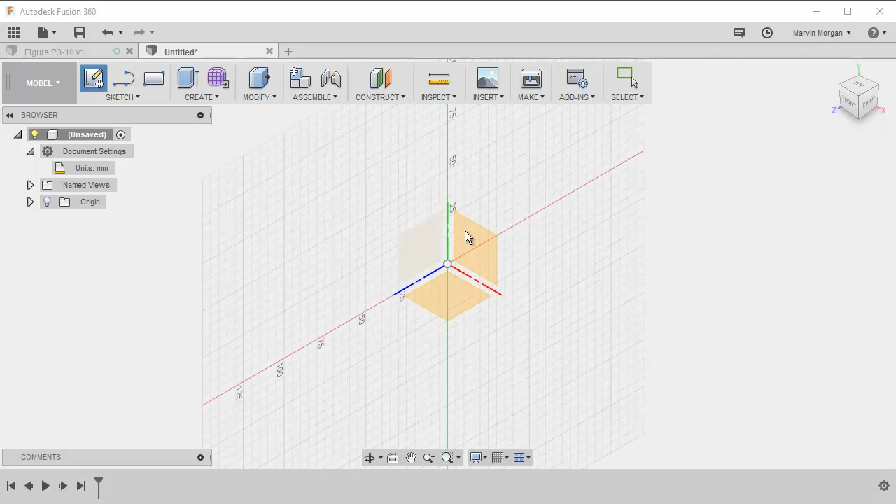From here we're going to begin a new sketch. I'm going to choose the front face of this object, using the front option of the cube, and click on that surface. For this drawing, I'm going to use a rectangle with the center point. My center will be the origin, and I'm going to stretch it out.

I'm going to type in the overall lengths. For the bottom, it should be 100 millimeters, and the overall height is 50. Once both measurements are locked in, you can take your mouse and click.

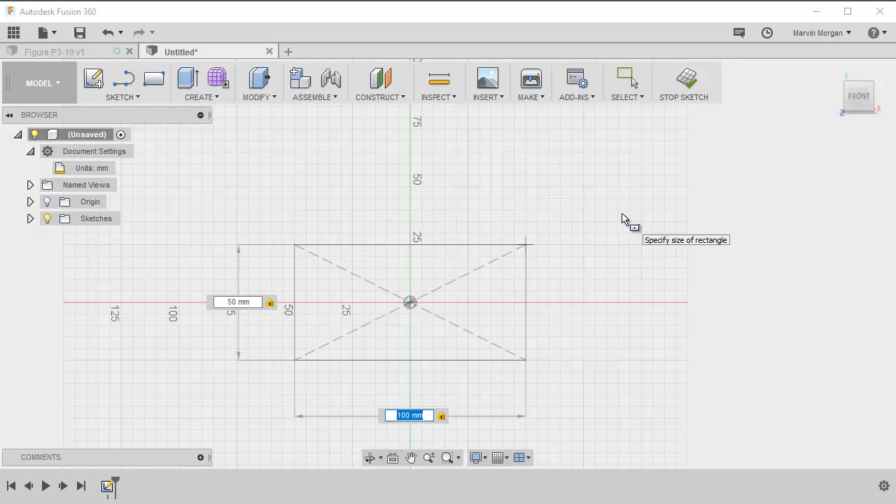Next, we will draw pretty much the profile of the front face. I want to begin with drawing a line from here over. Again, I'm not seeking accuracy at this point, I'm just drawing exactly what I see. There is a line that comes down a little lower and then over, and we have a rectangle that's about here in this spot.

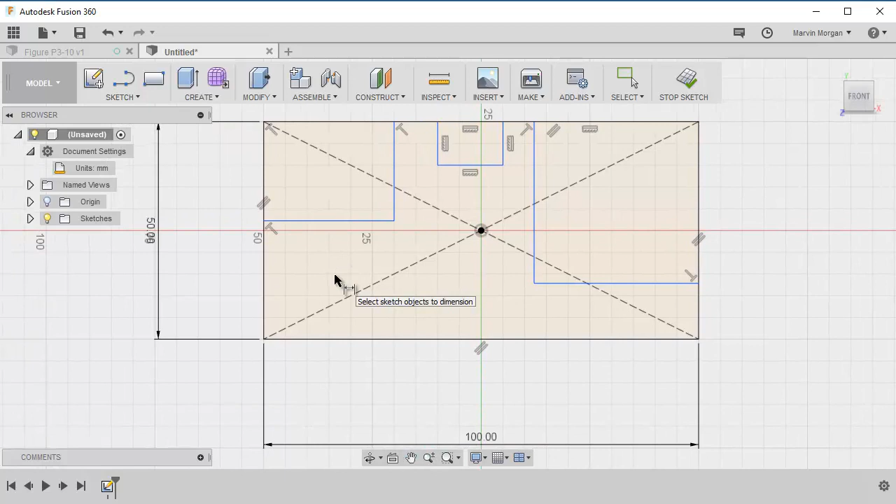Now I'm going to use my dimension command and dimension my lines for accuracy. So from this line to the bottom should be 30 millimeters. Over here, from this line to the bottom, we're looking at 15. This line here, total distance, is at 30. In between here and here should be 40.

The box is centered in the 40, which from this line to this line we're looking at 10, and over here we're looking at 10. Our box height from here to here should be 15.

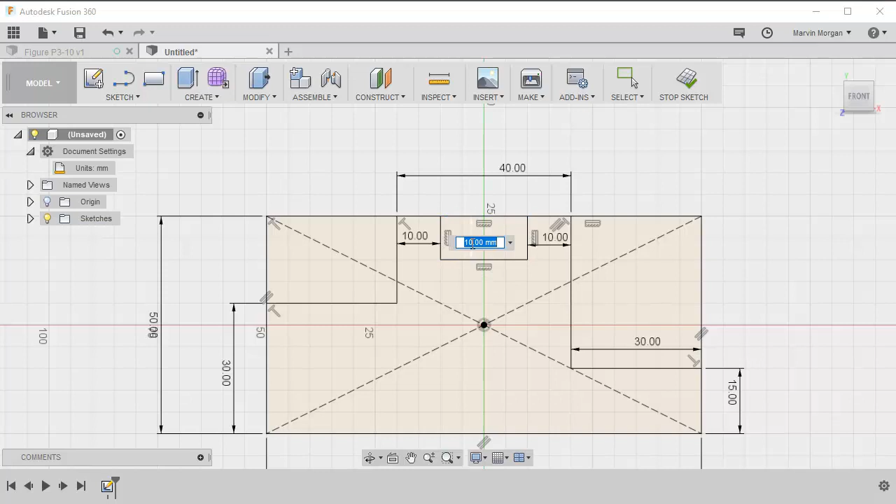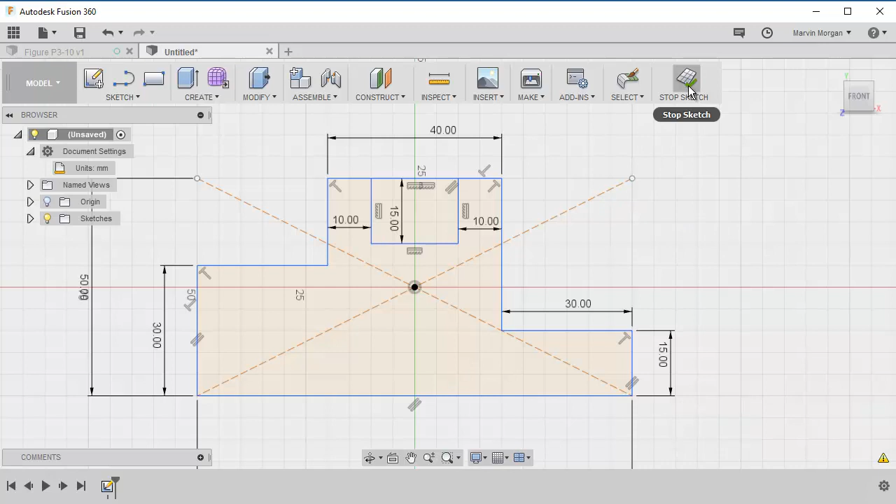That completes the profile. Now I want to use my trim command and trim the unwanted lines that we do not need. At this time, I'm going to hit the stop sketch button, look at it from a perspective view, and extrude. For the extrude, I'm going to include both profiles, and I want to go the opposite direction, so I'll do a negative 50 and hit OK.

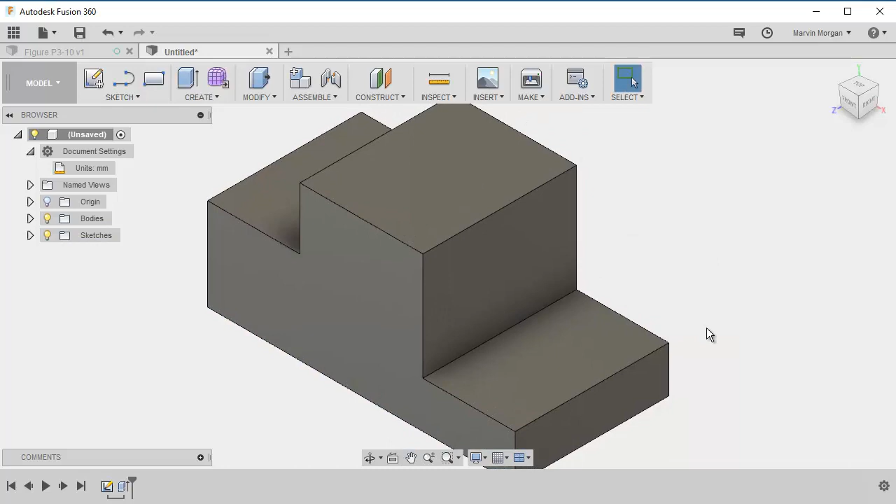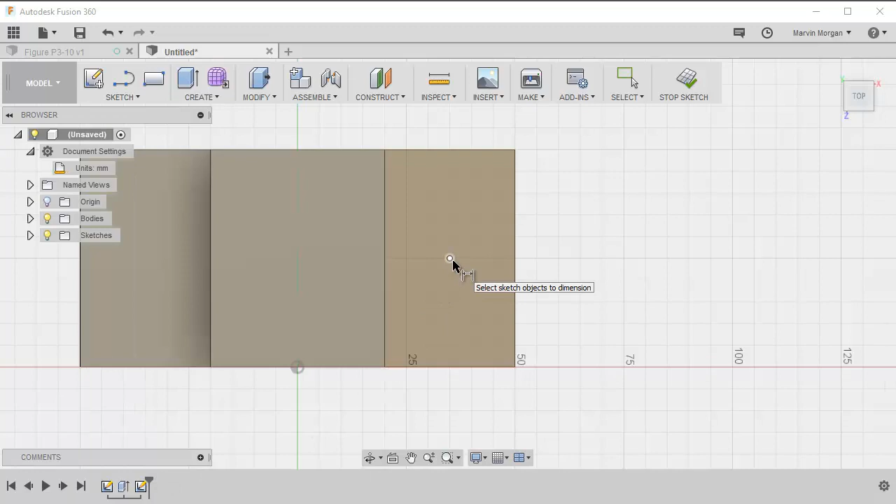Now I'm going to produce a new sketch on this top surface, and I'm going to provide a point for that surface. I'll use my dimension command and organize my point. My point should be from the point itself to this back line 25 units, which it is. From the point to this line, it should be 15 units, which it is.

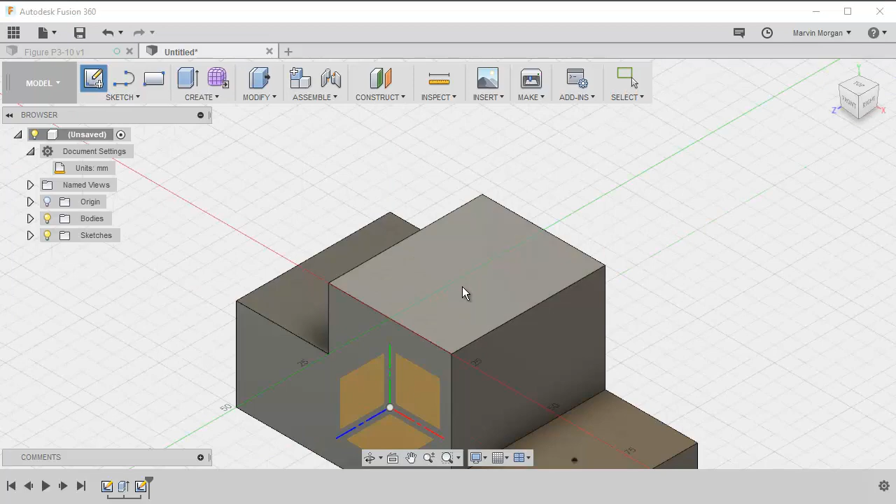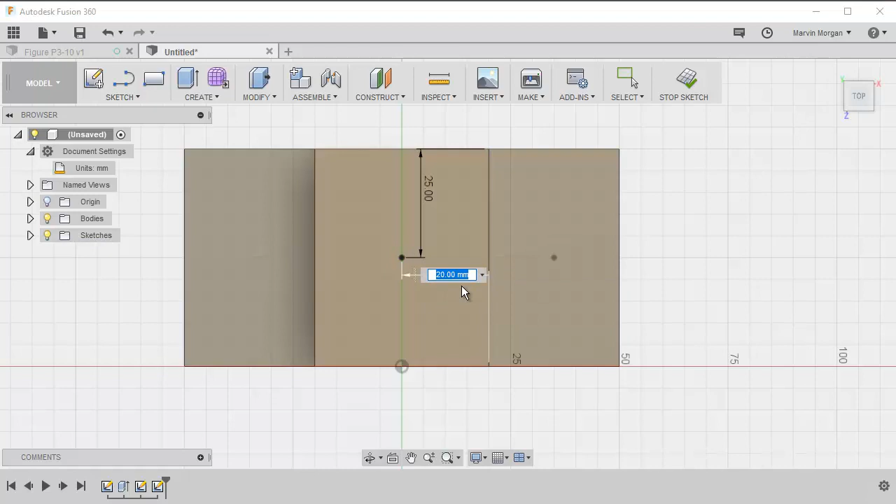I'm going to stop sketch, go to my sketch command again, hit the top surface, create another point, and then use my dimension option, click, and that should be 25 units, which it is. And from the edge over should be 20 units, which it is.

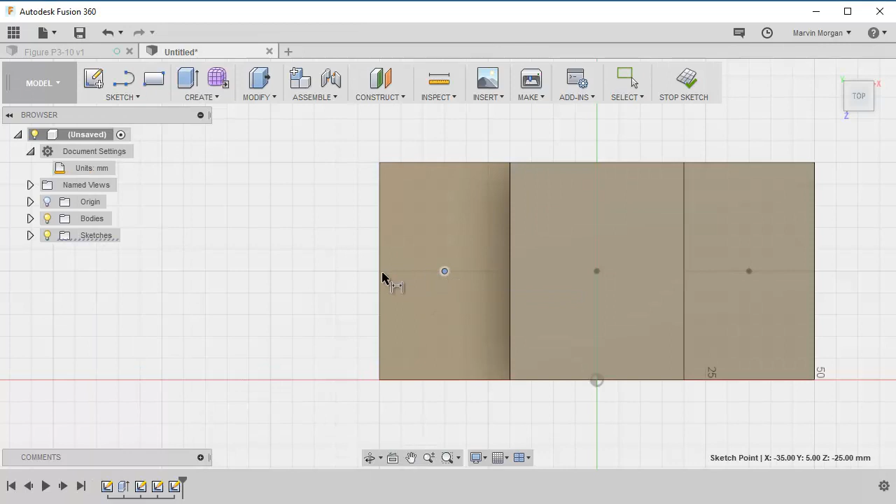I will stop sketch, come to the opposite side, do a new sketch on this surface. Again, going back to the point, use my dimension command to make sure it's in the right location. So from the edge over we're looking at 13, and from this point down we're looking at 25, which it is.

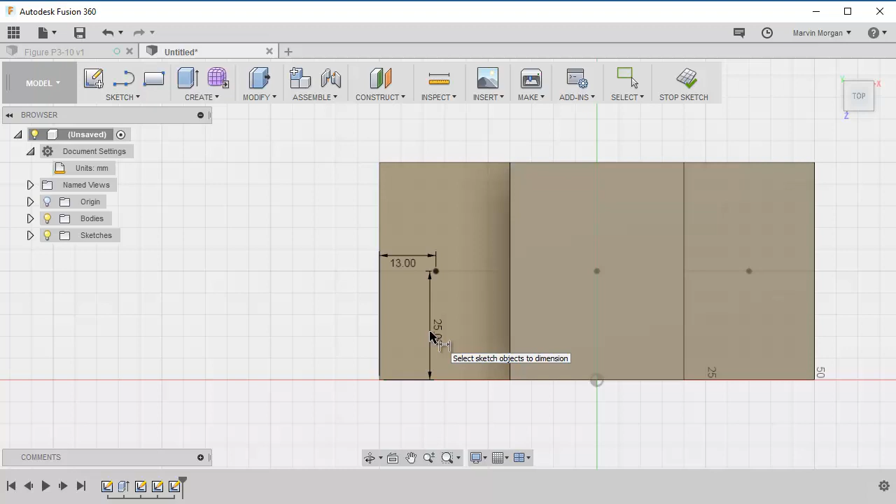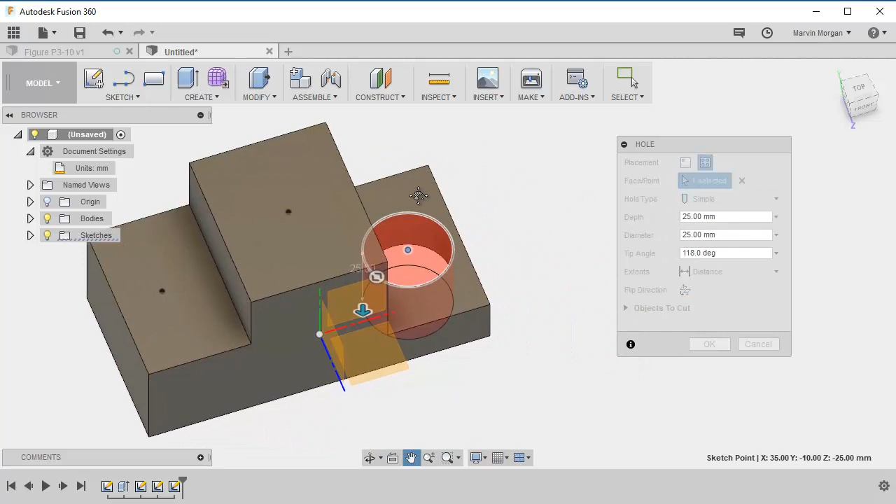At this point, we're going to stop sketch and produce our circles or holes. We'll go back to our create button and use our hole feature. We will select the point. This hole has a diameter of 20 units, so we'll type in 20. The depth should go all the way through, so where it comes to the extents, we're going to change the distance to all and hit the OK button.

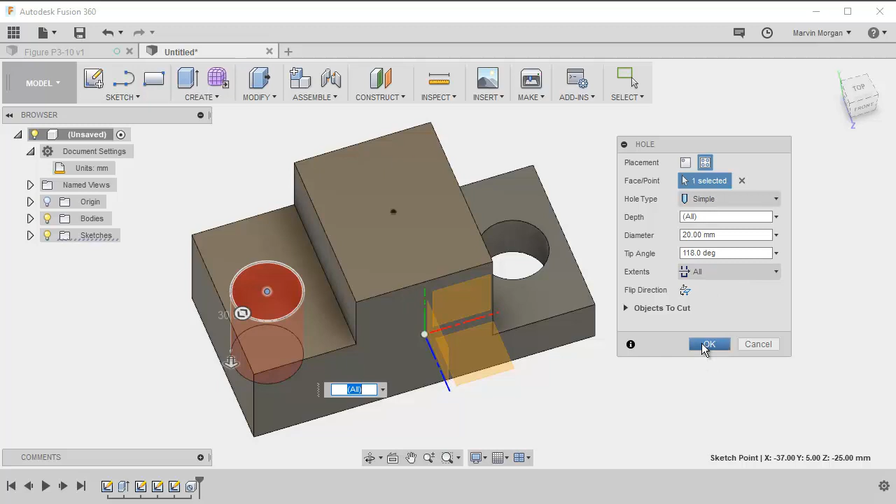We'll come to the opposite side, do another hole, click on that one. Again, the diameter is still 20, the distance is all, and we'll hit OK. The very top, again we'll go back to create hole and click on that point. Now the top diameter is actually 30, so we'll change that to 30, make sure it extends through all, and hit OK.

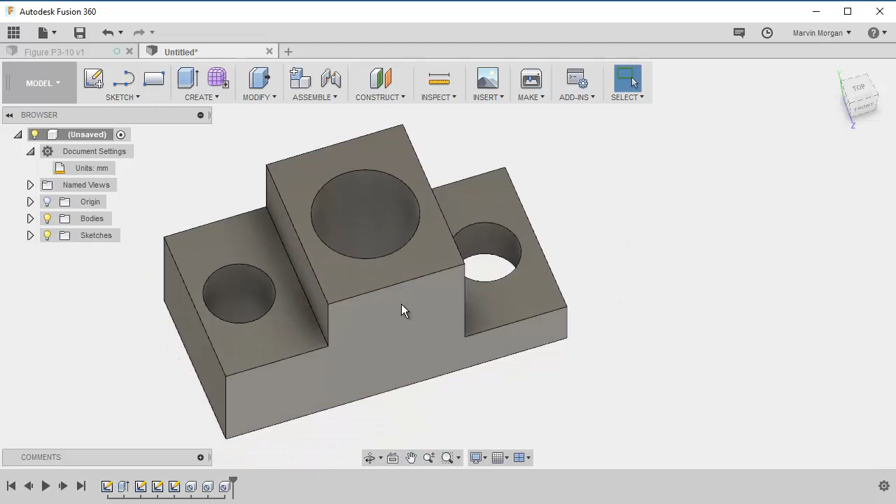Finally, we did a sketch in the beginning where there was a rectangle. We need to go back to that particular sketch, sketch 1, and turn the light bulb on. At this time, I'm going to use this profile and do a cut extrude. I'm going to click on that profile and create more of a cut. Where it says extents, I'm going to choose to object.

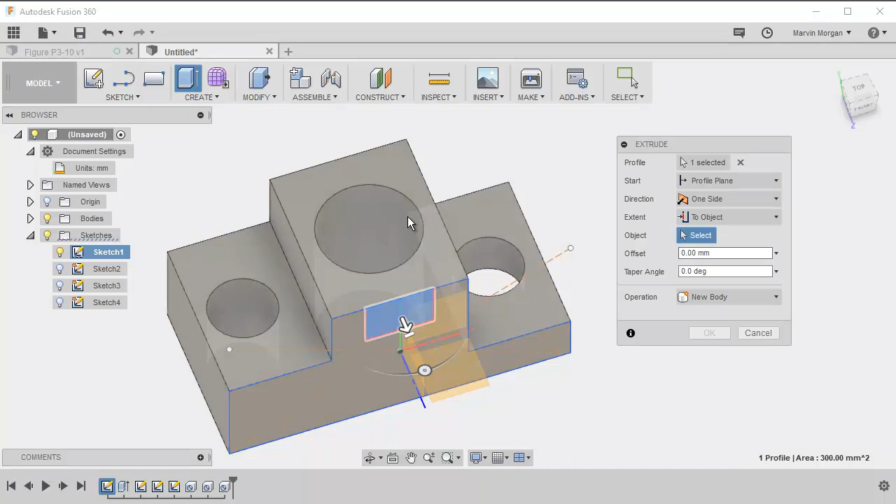From there, I'm going to click in the inside circle because I want my extrude to go into the drawing, but I don't want it to go all the way through, so it's going to stop at my circle. Notice the operation says cut, and I'm going to hit the OK button.

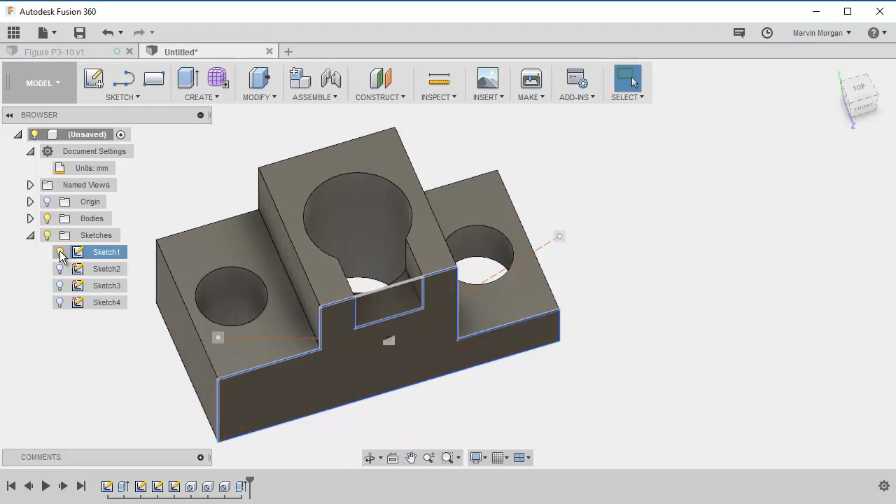And now I can turn off my light bulb for sketch 1 and better organize my picture. And at this time, we have a complete figure P3-10.